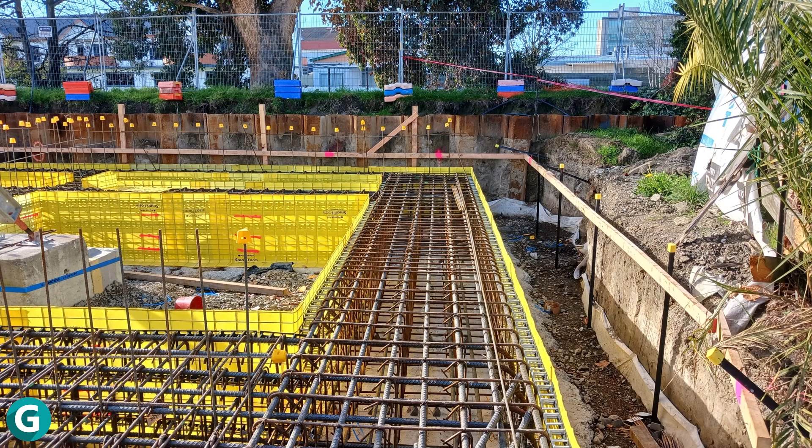Hi and welcome to this video on how to calculate the weight of reinforcing for any construction project requiring reinforcing.

So let's begin. Let's imagine you work for either the following: a reinforcing supplier, a main contractor, a residential builder, or you are just interested in learning how to work out the reinforcing weights required for a project. You have just been handed a set of construction plans, and one of the tasks is to ascertain how much reinforcing is required for the project. How do we work out the total weight required, for which you can then either provide pricing or seek pricing?

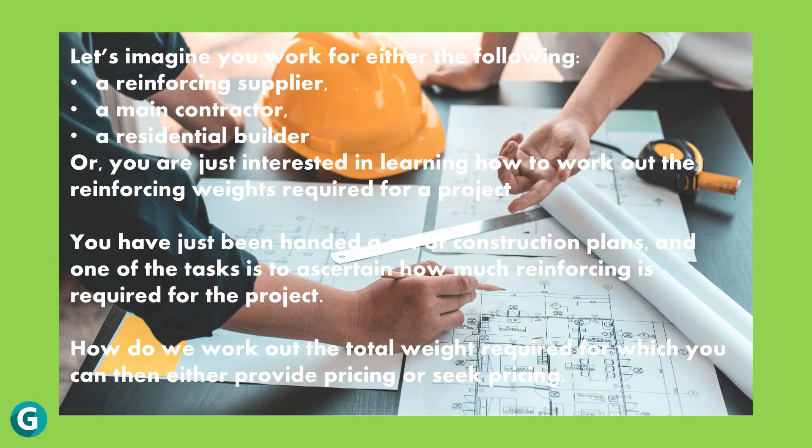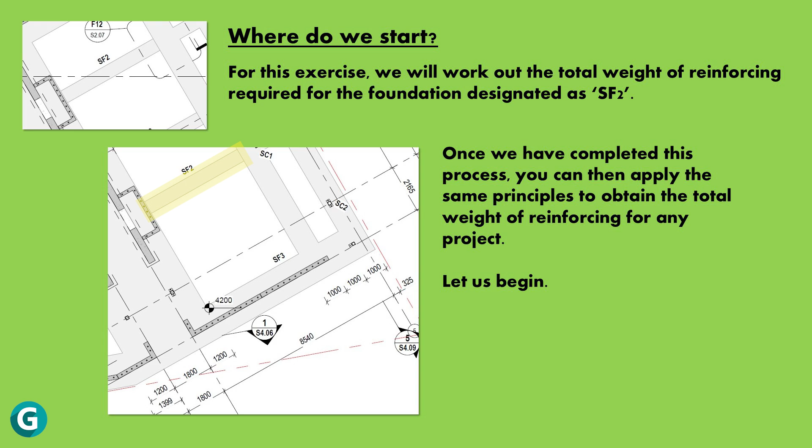Where do we start? For this exercise, and to make learning easier, we will work out the total weight of reinforcing required for the foundation, designated as SF2. Once we have completed this process, you can then apply the same principles to obtain the total weight of reinforcing for any project. So, let us begin.

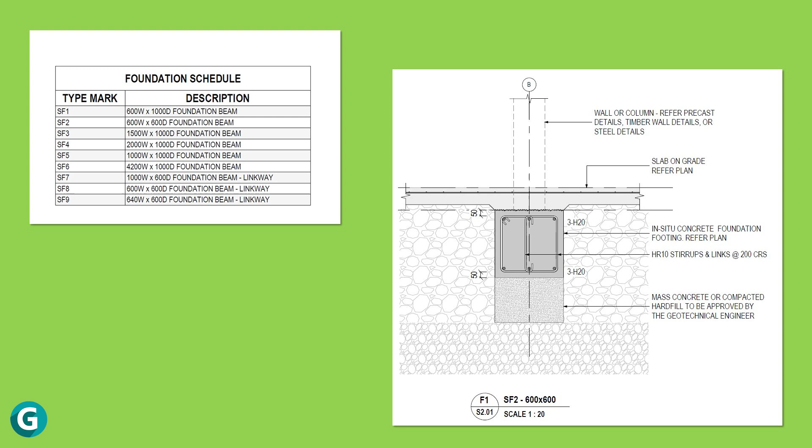In front of you, you can see two screenshots from a set of construction drawings, these being, on the left, a foundation schedule in which we can identify SF2 as a 600 wide by 600 deep foundation beam. And on the right is a cross-section through the SF2 beam, clearly identifying it as a 600 wide by 600 deep foundation beam. For the purposes of this exercise and to simplify our learning, we will ignore the meaning of the letters H and HR as highlighted. We will also ignore the reinforcing bends highlighted in yellow.

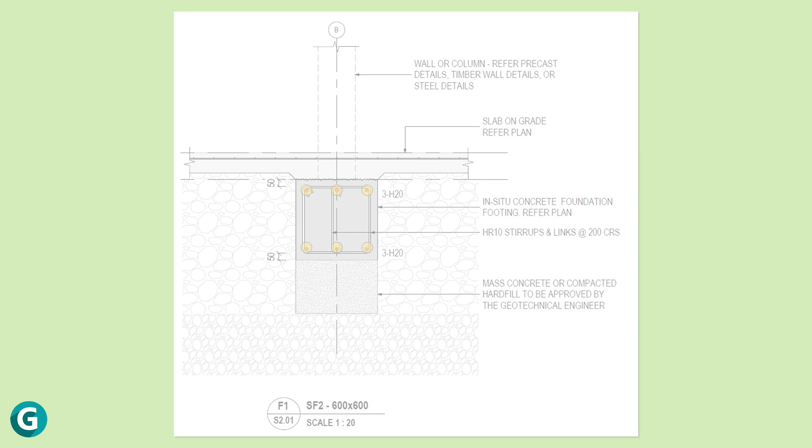From the cross-section shown, we will now identify the reinforcing specific to the SF2 foundation. These are the stirrups at 200 centres, which are shown here in red, the links also at 200 centres, which are shown here in yellow, and the H20 bars, 3 at the top and 3 at the bottom, running the entire length of the SF2 foundation beam. Our next task is to work out the lengths of the stirrups and links, remembering we are not going to include for the bends as noted earlier.

To calculate the stirrup length, we ask ourselves, what do we know from the cross-section? Firstly, we know that the foundation measures 600 by 600 millimeters. Secondly, we know that it shows the stirrups to have 50 mm cover to the edge of concrete on all sides. So, can you now work out the stirrup length? Okay, if the sides of the foundation measure 600 millimeters and the cover is 50 millimeters on either side, we simply deduct 100 millimeters from 600 millimeters, leaving us with 500 millimeters. Then, if one side measures 500 millimeters, then times this by 4 to give us 2000 millimeters or 2 meters. Based on the explanation just given, can you now work out the length of the link? Yes, you've got it. This measures 500 millimeters, as there is only one dimension to measure.

Before we move on to the next slide, please note the following. Number 1, we know the length of one stirrup measures 2000 millimeters or 2 meters. Number 2, we know the length of each link measures 500 millimeters. Number 3, the H20 reinforcing shown at the top and bottom of the foundation runs the entire length of the foundation. Number 4, the stirrups are found at 200 mm centres along the foundation. Number 5, the links are found at 200 mm centres along the foundation.

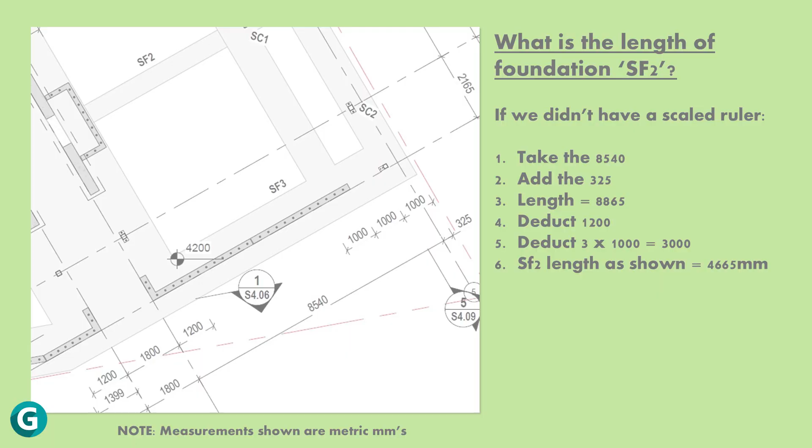Now we know the length of the foundation, we can now work out the total length for the stirrups, links and bars. Let's work out the total length of the H20 bars first, as this is the simplest. We know there are 6 H20 bars running the entire length of the foundation. Thus, 6 times 4.67 meters equals 28.02 meters.

In the case of the stirrups and links, we know that they occur at 200 mm centres along the entire length of the foundation. So, we need to know how many in total there are in the foundation. Quite simply, we divide the length of the foundation, 4.67 meters, by 0.2 meters, equaling 23 number, rounded to the nearest number. Then, for the stirrups, we simply multiply 23 by the length of each stirrup, which was 2 meters, giving us a total length of 46 meters. And for the links, we simply multiply 23 by the length, which was 500 millimeters, giving us a total length of 11.5 meters.

It's quite a lot to take in if you've never measured reinforcing before. So please stop the video now to review, go for a drink or some food, and then press play to carry on and continue when ready.

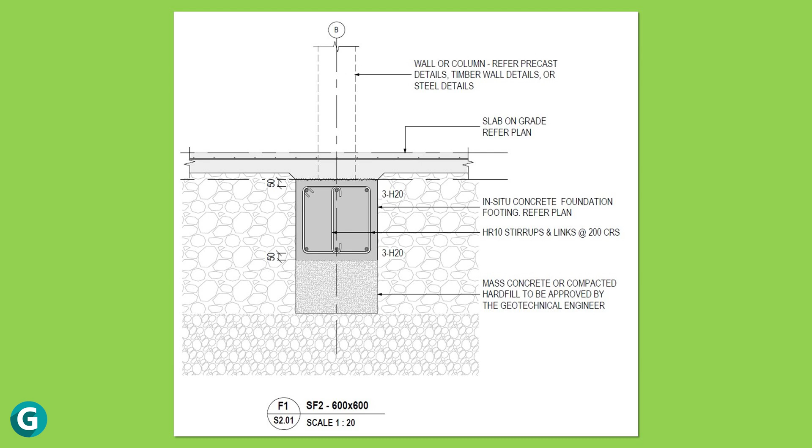The next piece of the puzzle is to understand what the numbers mean next to the letters H and HR, that is H20 and HR10. Well, these numbers tell us what the diameter of the reinforcing is. For this foundation, the reinforcing bars are 20 mm and both the stirrups and links are 10 mm. And for the final piece of the puzzle, we need to know what is the mass of the reinforcing, i.e. kilograms per meter. In our specific case, we have 10 mm and 20 mm reinforcing. Thus, the mass for 10 mm diameter reinforcing is 0.617 kilograms per meter, and for the 20 mm diameter reo, it is 2.466 kilograms per meter.